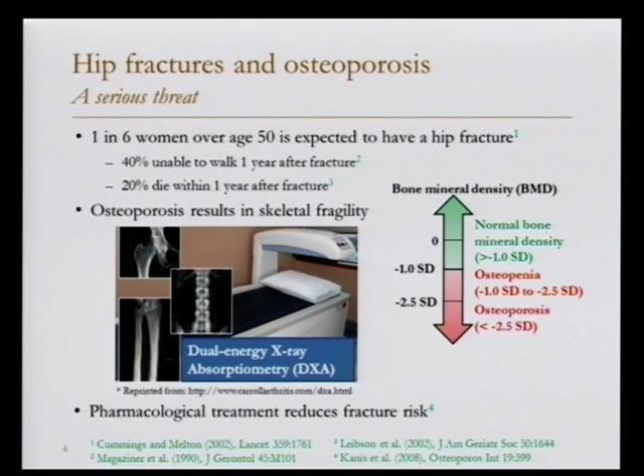As a final consequence, the bone gets brittle, and patients can experience a fracture with just minimal trauma, such as a fall from standing height. For this reason, they're called fragility fractures.

The diagnosis of osteoporosis is done using a device called dual energy X-ray absorptiometry, or DEXA. This device can take a calibrated X-ray image from which bone density can be calculated in a certain area. This density is then compared to the bone mineral density of a young, healthy woman of the same population group, and if the difference is below 2.5 standard deviations, the patient is classified as osteoporotic.

So what happens when you're osteoporotic? Normally you get a pharmacological treatment, consisting of drugs like bisphosphonates, whose main effect is to slow down the bone resorption process. For this type of treatment to be really effective, we need to catch those subjects at risk for fracture in time and with good accuracy.

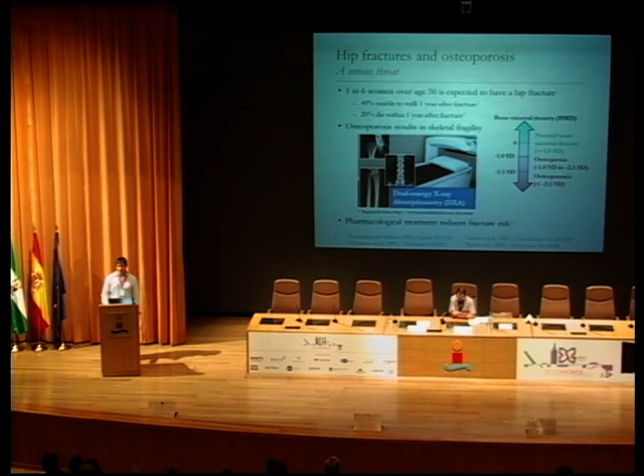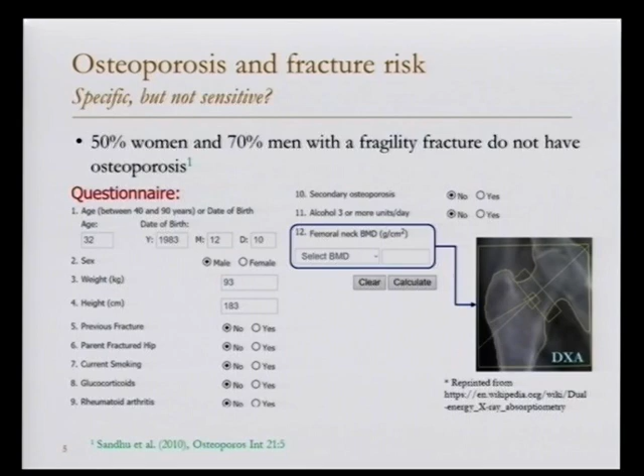For a long time, people at high risk of fracture were considered simply those who have osteoporosis. While it's true that people with osteoporosis have a high risk of fracture, there is also 50% of women and 70% of men who experience a fragility fracture without meeting the requirements for diagnosis of osteoporosis. To account for this, more complicated methods combine bone mineral density with epidemiological parameters, such as previous history of fracture, smoking, drugs, alcohol consumption, etc., to get a better prediction.

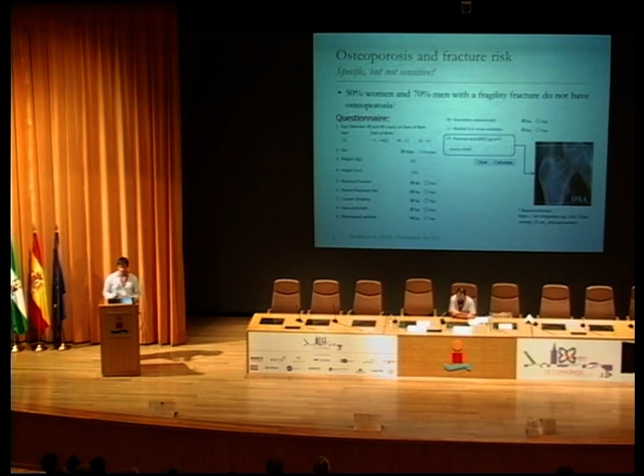However, even with these methods, studies report at least 30% of people who experience a fracture without being diagnosed to be at risk.

One reason for this could be that these methods are only capturing part of the problem, where we can claim that the actual health status of the bone is given not by the bone mineral density itself, but by how strong that bone is. That can be seen as a combination of the density of the bone, how big the bone is and what's its shape, and the different loading conditions to which the bone is subjected.

It's therefore not surprising that finite element models are able to predict the strength of the bone better than methods based on DEXA can do. This was already shown in 1999 by a study by Cody and collaborators. So that's nothing new in a way.

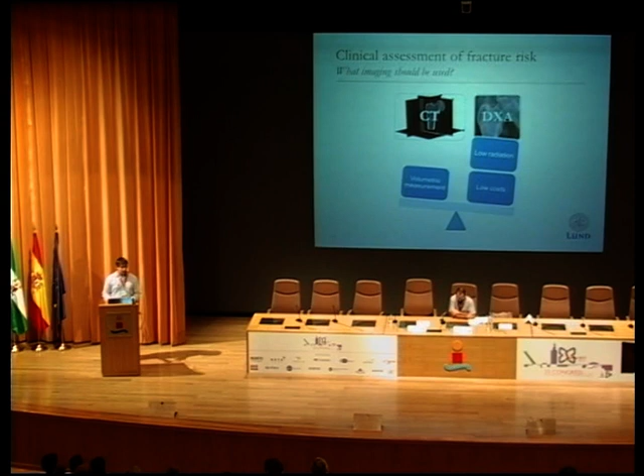So why are we not using finite element models then? Well, there are several reasons, one of which is that to build a three-dimensional finite element model, you normally need a CT scan, which has the advantage of providing volumetric measurements and the shape of the bone, but also has a few downsides, namely a higher radiation dose given to patients, and higher costs for healthcare systems.

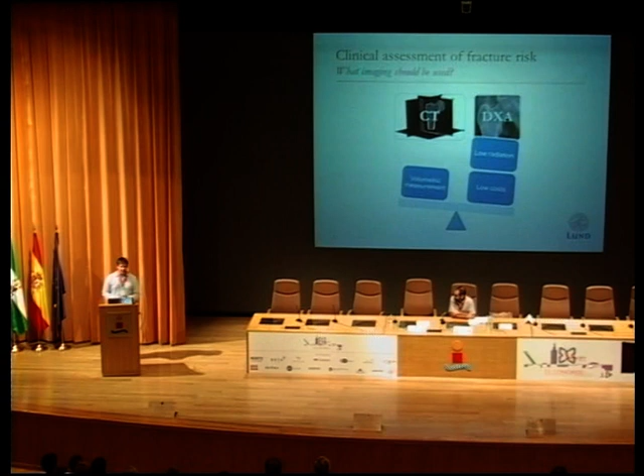As a result, the majority of screening for fracture risk and osteoporosis is nowadays performed with DEXA. So the idea behind this project is basically, can we build a three-dimensional finite element model based on a single DEXA image? To do this, we can use statistical models.

These models are based on previous knowledge of the variability of the anatomy of a femur, in this case a human femur, within a certain population. If you look at a statistical shape model, that's a model where you put as input the anatomy of a population of femurs, and as a result you can describe all the anatomies in this population as the average shape for this population, plus a linear combination of the principal modes of variation within that population. In the same way, you can build a statistical appearance model in which you map how variable the distribution of bone density is for a population of bones.

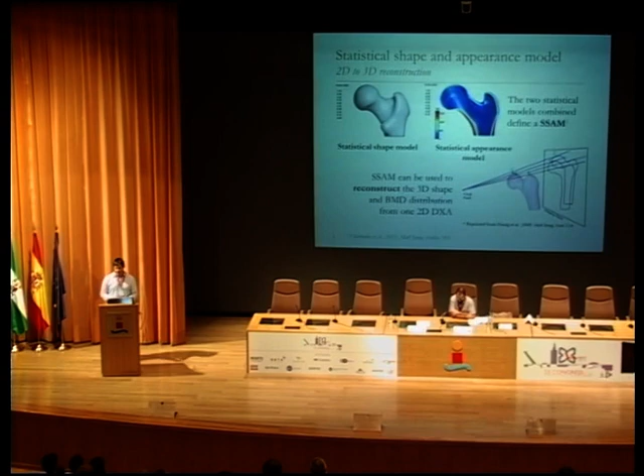When you combine these two methods together, you get what we call the statistical shape and appearance model, which I will call SSAM in the remaining of this presentation.

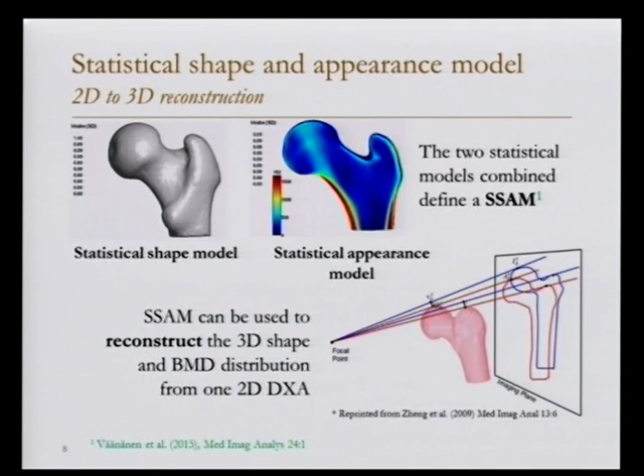So how do we reconstruct the 3D shape then? You can take a SSAM, for example, and manipulate it to select the instance whose projection on a plane gives the best fit when compared to the target image of the patient. So you assume that that one is the actual anatomy of the patient.

That leads to the aim of my PhD project, which was to develop and validate a subject-specific finite element procedure which could predict the mechanical behavior of human femurs starting from a single DEXA image.

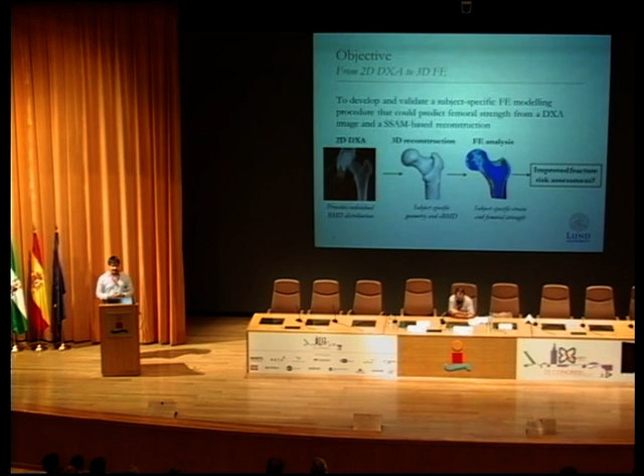To fulfill this aim, I tried to follow this flowchart during my PhD studies, where the three starting points were the mechanical tests, which were used as a basis to validate the predictions from the finite element models.

CT-based finite element models were built, which represented the state of the art in terms of how accurate a finite element model can be for this sample, and also the SSAM, which was used to reconstruct the 3D shape of human femurs starting from a single DEXA image.

The material used in this thesis consisted of 6 composite bones, for which we had CT images and experimental measurements available from a previous study.

We also had 3 human bones onto which the actual tests were performed, coming from 3 male donors from Finland, age ranging between 22 and 58 years old.

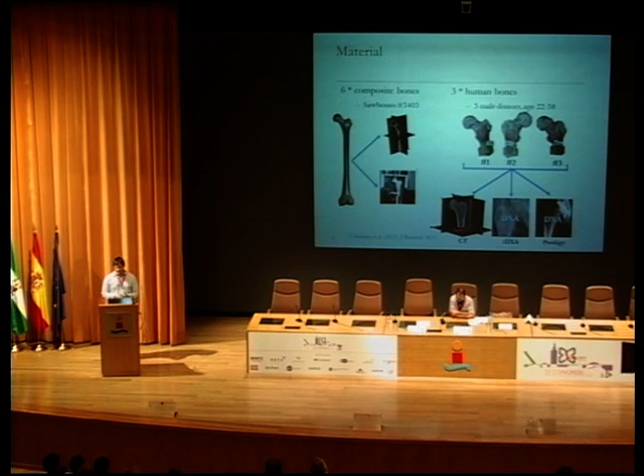For each of these 3 femurs, we had images from CT scans, as well as 2 different DEXA devices, iDEXA and Prodigy from GE, where iDEXA is a newer device with a higher image resolution.

The first step in the project was to perform the mechanical test. When performing a mechanical test, one of the first questions we should address is what do we want to measure and how are we going to get those measurements?

Other than the force displacement curves, which are recorded in pretty much all mechanical tests, we usually like to measure the deformation of the specimen during the test. You can do this with different techniques, some discrete and contact-based, like strain gauges or fiber Bragg grating sensors, or others that reconstruct the full field strain distribution, like digital image correlation and digital volume correlation.

At the moment, strain gauges are still considered the gold standard when it comes to measuring deformation on bone, and that's because they are very well established, known to be accurate, and we know well how to attach them to the bone.

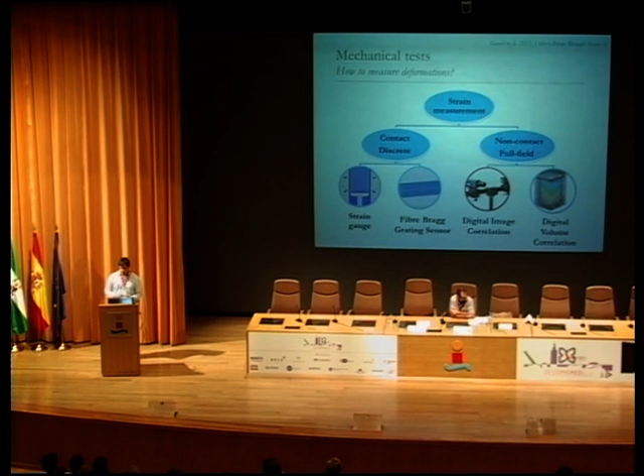But if you look at the program of this conference, you will see that full field measurements have been used more and more in recent years, mostly because you can get way more measurements than what you can get with strain gauges.

So we decided to use digital image correlation in our experiments. For those who don't know, the concept behind digital image correlation is in a way quite simple: if you have your specimen under test, you use 1 or 2 cameras, or theoretically even more, to record a certain surface of the bone.

What you do is paint your sample with a white background and a black randomly distributed speckle pattern, then perform your test.

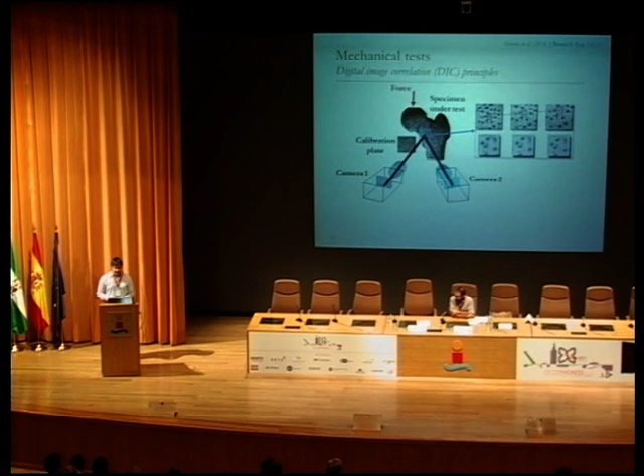After that, you take your images and try to track the displacement of each of these black speckles across consecutive frames. What you end up with is a matrix of displacement, which, if you take the derivative, gives you the matrix of deformation for the surface tracked by the cameras.

That's an example of what you can get. This refers to the major principal strain of one of the bones in our sample, very close to fracture.

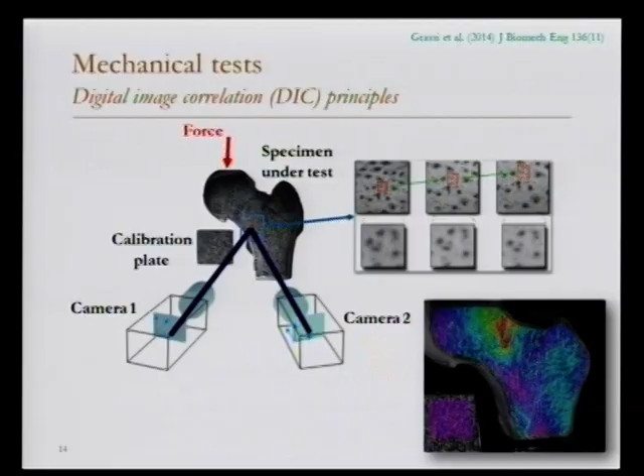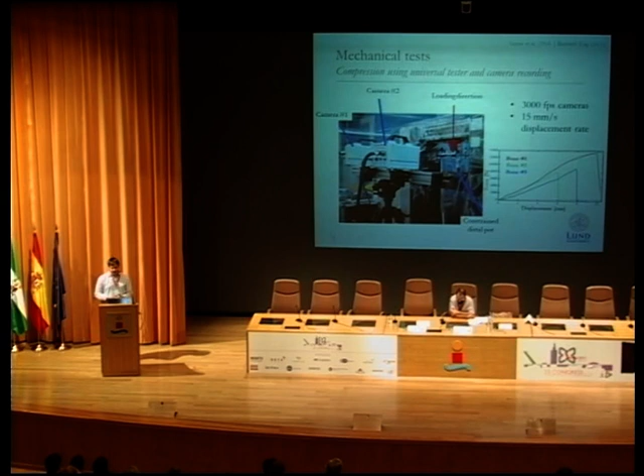So that's a picture of the mechanical test. To perform this test, I went to Delft in the Netherlands, to the Technical University. We placed a bone under the universal testing machine, with 2 cameras to record the experiment.

In this experiment, the distal part of the femur was fully constrained, while we applied compressive load on the femoral head until a macroscopic fracture could be spotted.

We recorded the experiment at 3,000 frames per second, while compressing at a controlled displacement rate of 15 millimeters per second.

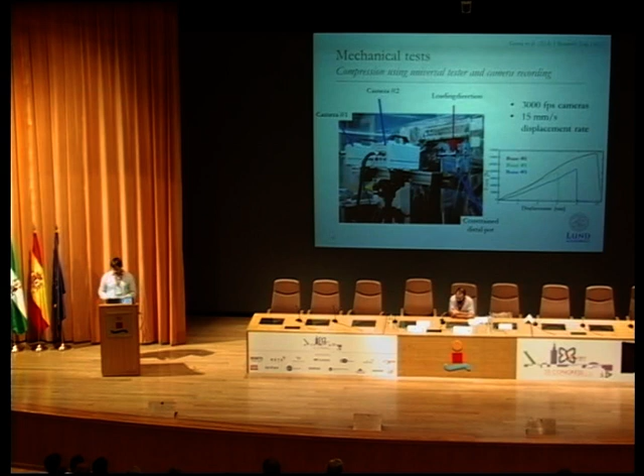After the test, we performed digital image correlation, which proved to be a harder task than we thought at the beginning. There are a lot of parameters, and you have to keep control of a few things. After playing with the parameters, we ended up choosing a subset size of 25 by 25 pixels, which physically corresponds to the size of the yellow squares in the picture.

We also realized there was noise in the measurements, not surprisingly. So we placed an aluminum plate alongside the bone, which was not deformed during the test since no force was applied, but was moving alongside the bone. We used that plate to check the noise levels in the measurements, and to reduce the noise, we applied a 100 Hertz low-pass filter on the displacements before deriving the strains. As a final result, we obtained about 10,000 measurements per bone.

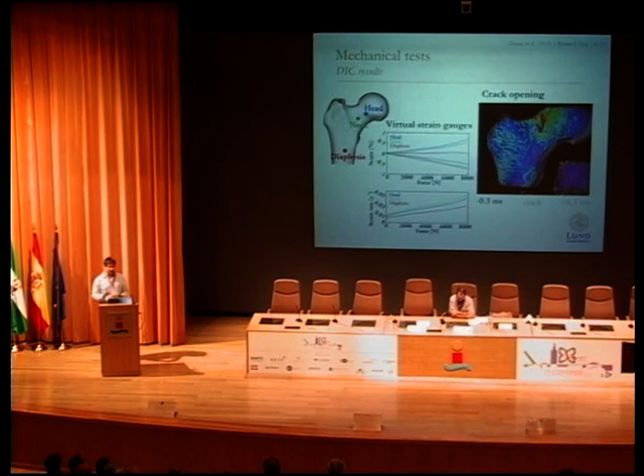Here I'm showing just a few results of what you can extract from these measurements. First, we defined 3 virtual strain gauges on the head, neck, and diaphysis level, and extracted the major and minor principal strains from those regions. This was essentially a way to make a qualitative comparison between the measurements from digital image correlation and what you normally get using strain gauges, comparing against previous studies performed in a similar way.

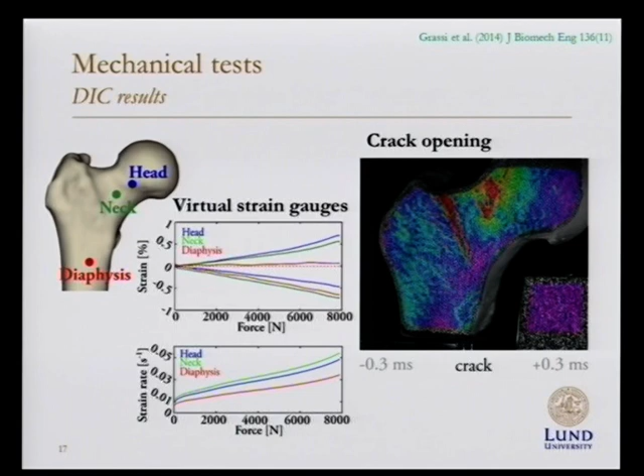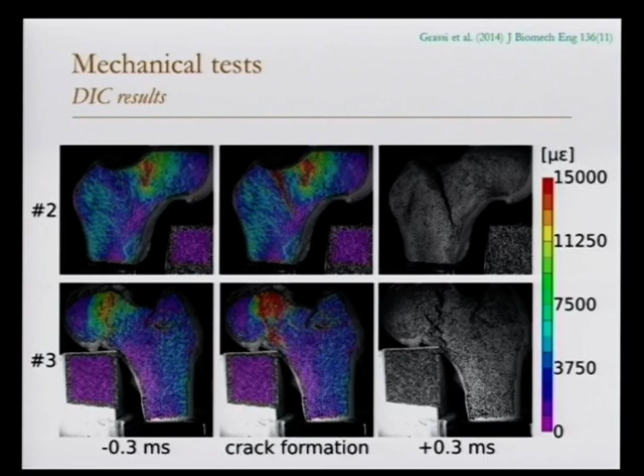On the right-hand side, we can see the pattern of the major principal strain, at least for the moment when the crack opens for specimen number 2. Here again, we can see what happens with digital image correlation when you try to map the deformation at the moment when the crack appears, for specimen number 2 and specimen number 3 in our sample.

At that stage of the project, we ended up with a lot of measurements, essentially just a lot of data. We got some nice clues, but the next step was to build finite element models based on CT images and match those predictions with the experiments. The first question was, how are we going to compare the predictions from the finite element models to the measurements from the experiments, since now we had thousands of points to compare?

To address this issue, we took 6 composite bones, which are quite easy to model. We had the CT scan so we could reconstruct the shape, and we know the material properties from the manufacturer. So we built finite element models that we could trust in a way. We also had mechanical measurements taken by Sami Vanhanen at University of Eastern Finland, where he used digital image correlation to get the strain pattern for these composite bones.

We thought about how to perform the validation. First, we registered the point cloud from digital image correlation over the anatomy of the composite bone. Then for each surface element of the finite element model, we defined the smallest sphere that circumscribed the element, and we ran the validation by selecting the experimental points inside the sphere, comparing the average value of these points to the strain predicted by that element.

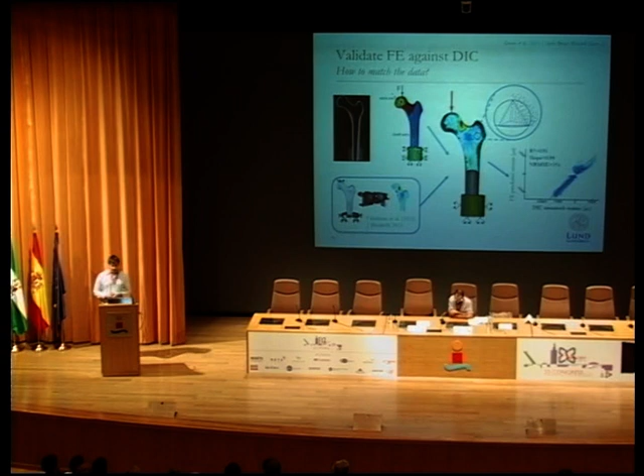Then it was time to build the finite element models. This is a quite consolidated procedure. We took the CT stack, segmented each slice, and extracted the shape. After this, we performed reverse engineering, where we also added the distal pot that was constraining the bone during the experiment. Finally, we meshed the shape using second-order tetrahedral elements.

At last, we mapped the material properties. Here again, we used inhomogeneous isotropic material properties, where we mapped the Young's modulus on each element based on the underlying CT values and the law that links the apparent density of bone to the Young's modulus.

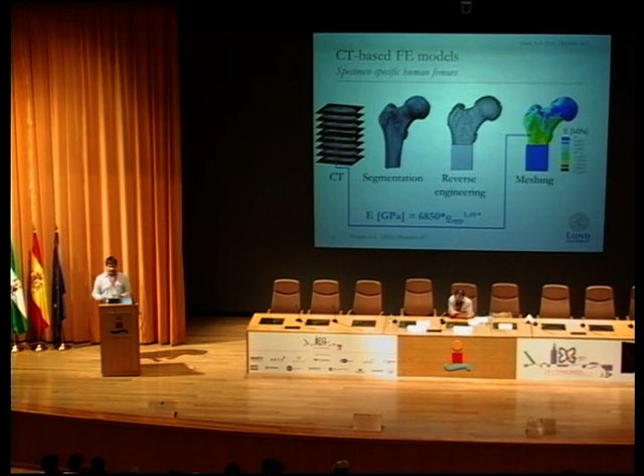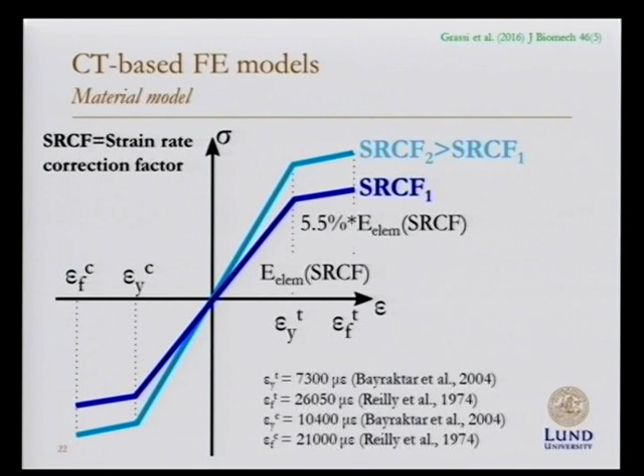But then we had to predict also how the bone fractures, so we had to think about the material model and the way the bone fractures. So what we did is that we came up with a quite simple material model with different strain limit values for tension and compression, and for yield and failure.

We took yield strain limit values from a study by Bayraktar and co-authors in 2004, and ultimate strain values from an older study by Reilly from the mid-70s. We built a material model in which whenever an element reaches the yield point, its modulus is reduced to 5.5% of the original modulus. You continue the simulation, and whenever the first element reaches the failed state, the whole model is considered failed. So that was relatively simple.

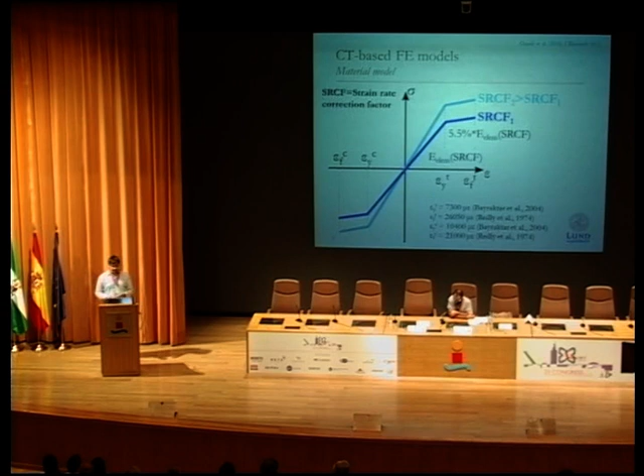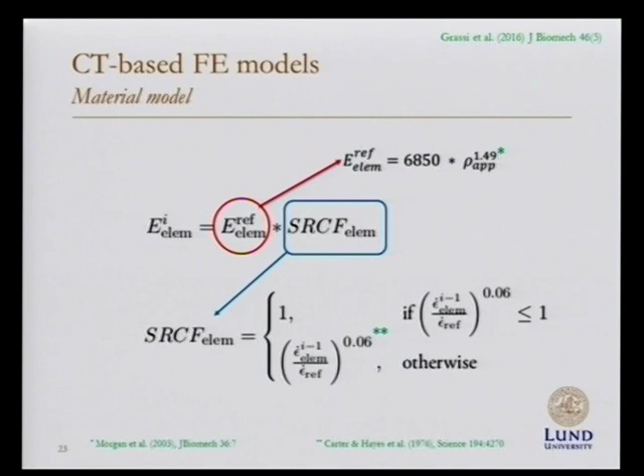Plus, we introduced a strain rate correction factor, which accounts for the bone getting stiffer when you compress it at higher strain rates. So the modulus of the bone is given by the reference modulus times the strain rate correction factor. The reference modulus is given by the empirical law linking modulus to apparent density, and the strain rate correction factor makes the bone slightly stiffer at high strain rates, using a power law to the power of 0.06, first proposed by Carter and Hayes in the mid-70s.

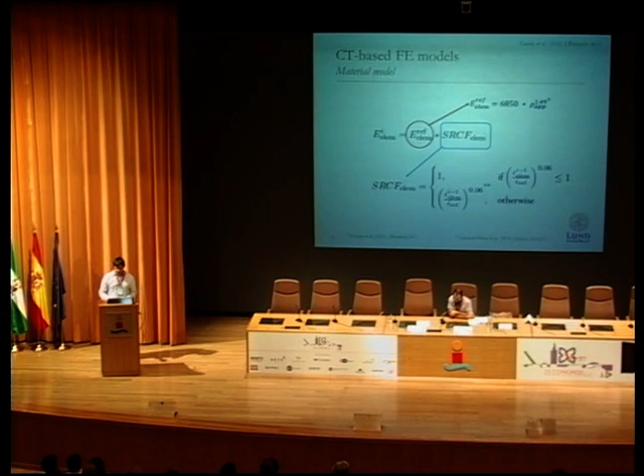So using this modeling approach, we performed our simulations and validated our results. For the 3 bones in our sample, comparing the principal strains at a load of 4 times body weight for each patient, we obtained a coefficient of determination well above 0.9 for all 3 femurs and for the pooled result as well. Slope and intercept were close to unity and 0, and the normalized root mean square error was about 10%.

So we were quite happy with these results, since they pretty much match all the previous published studies available in the literature, with the significant difference that this time the validation was performed against thousands of measurements coming from digital image correlation, not from the 15 to 20 data points available with strain gauges.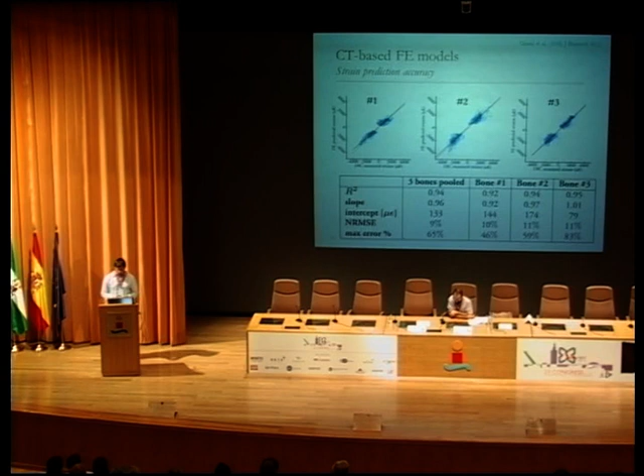This was, of course, not the end of the study, since we wanted to predict the strength of the bone, and so we did. With the material model and fracture criterion we developed, we were able to predict the femoral strength with an error below 2% for bone number 1 and bone number 2, whereas we could not validate bone number 3 because of a problem in the experiment slightly before fracture occurred. So even with only 2 bones, we were quite happy with this result.

Plus, we could see that the predicted fracture origin point was quite close to the experimental fracture rim, where the black line is the experimental fracture rim and the red points are where the model predicted the fracture to start. The model doesn't implement any crack propagation, so that's where it stops in this case.

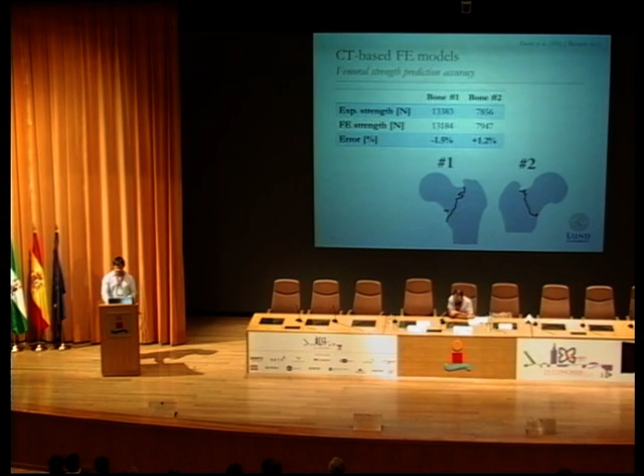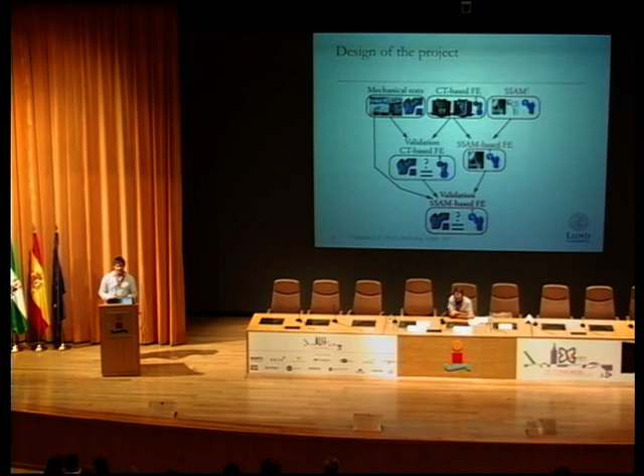So at this point of the project, we had the mechanical tests done, and we had a CT-based model which performed fairly well against these experimental measurements. So the last part was to take this statistical shape and appearance model and use it to reconstruct femoral anatomy starting from a single DEXA image, and see how well this could perform.

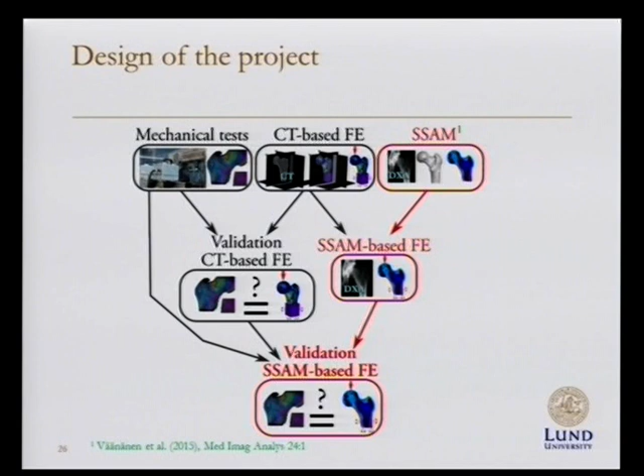So we validated everything against experimental measurements, and then compared against the CT-based model to see which performs best. The goal here was not only to see how well these could perform, but also what are the single components of this statistical shape model-based approach that affect the final accuracy.

So we built 3 types of models: one we call statistical shape model-based BMD models, where the shape came from CT images but material properties were reconstructed from DEXA images; the statistical shape model-based shape models, where it was the other way around; and last, the statistical shape model-based shape and BMD models, where both shape and material properties were reconstructed from the single DEXA image.

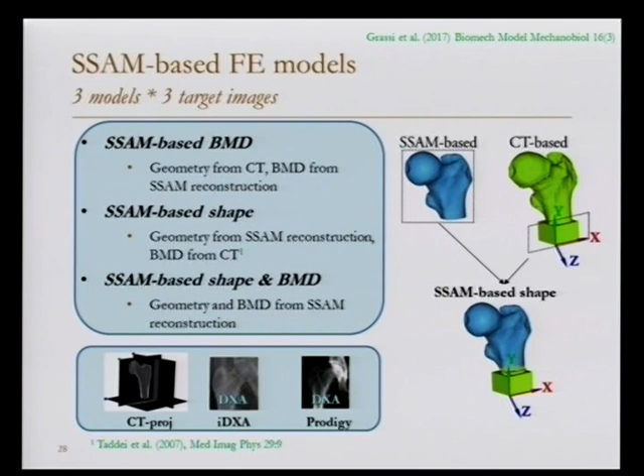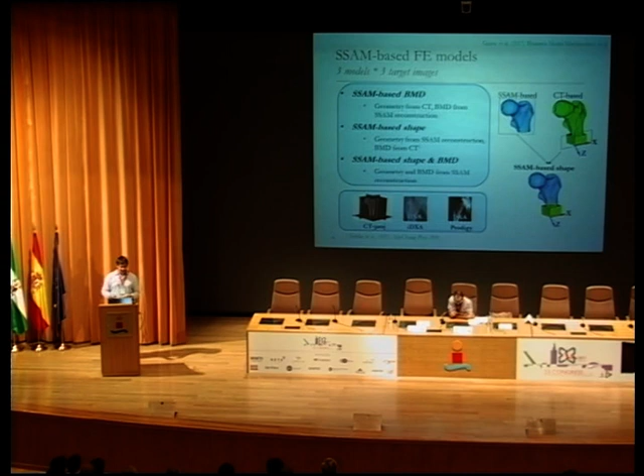We also did this for 3 different types of target DEXA images. One was what we call CT projection, obtained by projecting the CT volume over the anteroposterior plane, representing a sort of optimum in terms of signal-to-noise ratio. Then we had the 2 DEXA images from the DEXA devices, iDXA and Prodigy. So we built 3 models times 3 target images, and validated everything against the measurements.

So a first control we did was to check how good the statistical shape model was at reconstructing the shape.

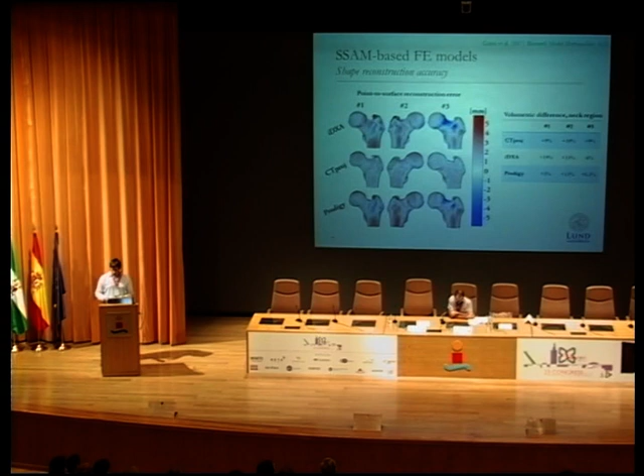When we reconstruct the bone completely from a DEXA image and try to predict the strains, we get a coefficient of determination between 0.87 and 0.92, depending on which target image you use, and a normalized root mean square error between 9 and 12%. That was quite good, since we can consider this just a mild decrease with respect to the performance of the CT-based finite element model.

We also tried to predict femoral strength, and here we had slightly higher errors instead, with an error of 6% for bone number 1 and an error of 19% for bone number 2. In general, depending on which model you build and which target image you use, you might have errors up to 20%.

Since we had a lot of models, we also tried to observe a couple of trends. The first was that the models using CT projection to reconstruct the shape were on average more accurate than those implementing iDXA and Prodigy, again because CT projection has a higher signal-to-noise content.

What was more interesting to observe is that iDXA is a 10-years-younger device compared to Prodigy, with much higher image resolution. But despite that, the performance between using iDXA and Prodigy was quite similar. So it's probably not the resolution, but the actual signal-to-noise ratio, that's the parameter we should look at when building these models.

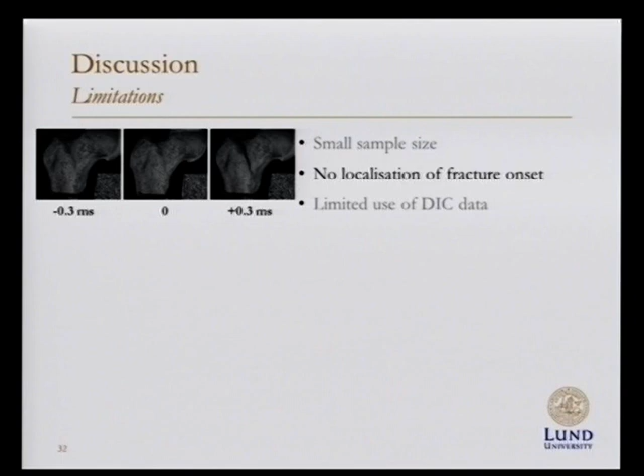A second limitation was that we were not able to localize where the fracture starts during the experiment. This is due to the fact that, if you look at these frames, there is a 0.3 millisecond difference between them, and still there is no crack at frame 0, while in the frame after, the crack has almost propagated all the way through the femoral neck. So even though we recorded 3,000 frames per second, that was not fast enough.

The other reason was that we were recording the anterior side of the bone, whereas for this type of loading condition, it is likely that the fracture originates either on the lateral side of the neck or on the medial side of the femoral neck.

So I suggest that future experimental studies, if possible, adopt a configuration like this, where one pair of cameras tracks the medial side of the neck and the other pair tracks the lateral side of the femoral neck. If you can get 4 cameras and measure the strains using digital image correlation, synchronized at all times, you can maybe get a better description of the strain levels in the bone when the fracture originates.

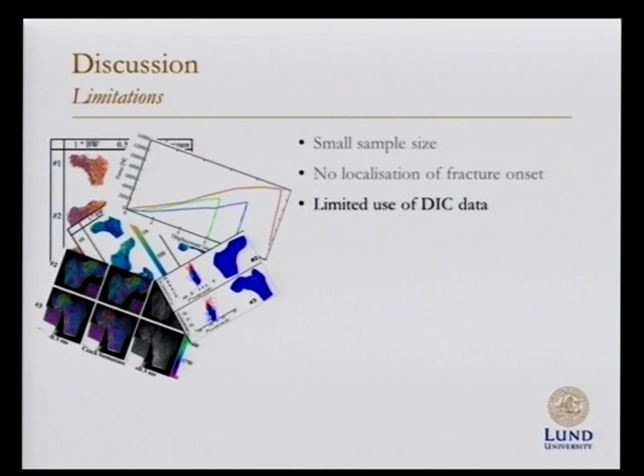A third limitation, which is more of a discussion point, is that after I did this experiment, I quickly realized that digital image correlation comes with a huge amount of data. It's thousands of points per thousands of frames per many bones. Despite trying different ways during my thesis to make use of this data, from plotting principal strain magnitudes to principal strain directions, strain limit plots, etc., most of the data I acquired went unused, or at least unpublished. In a way, I feel it's a pity.

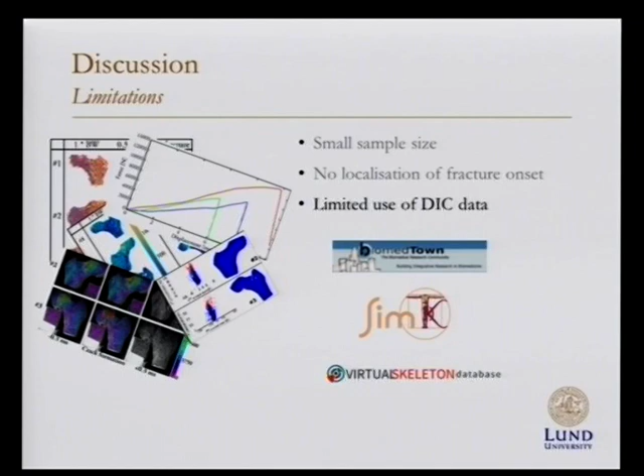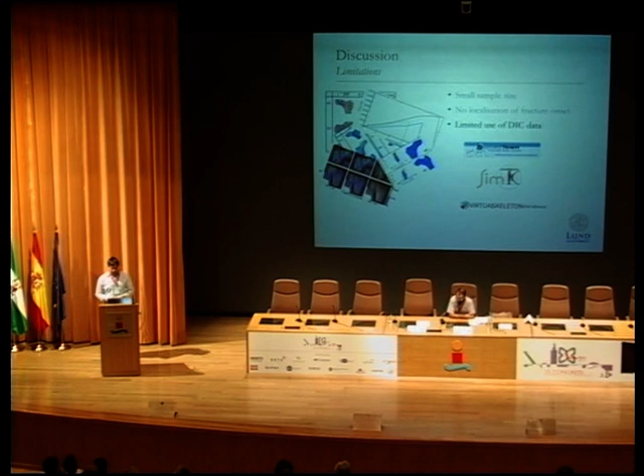I guess there would be many experiments like this with the same outcome. I don't know much about this, but I feel we should find a way to upload this data to some safe place where you can preserve authorship rights but still make it available for others to use if they want. That's a good discussion point about how to share this data safely. Here I'm just listing a few platforms that I know exist: Biomed Town, which we use in Bologna, SimTK, and others.

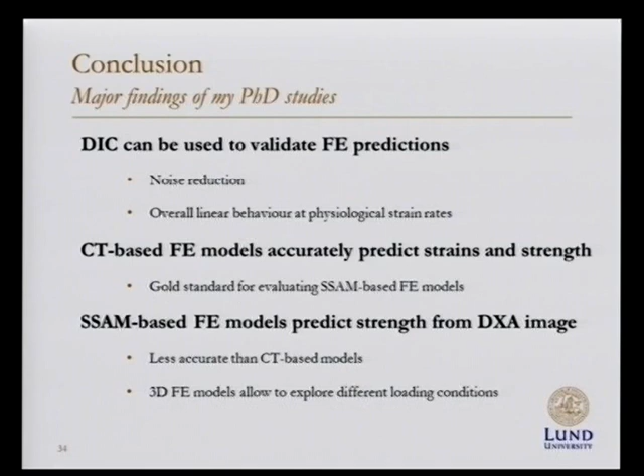To conclude about the findings in my PhD studies, the first major finding was that it's possible to use digital image correlation to validate finite element predictions in a quantitative way, which might sound obvious, but at the time the experiment was performed, to the best of my knowledge, no study had done that before. We also showed that we can reduce noise in DIC measurements, where it's important first to track the noise, because it can be very noisy, and you can reduce it using a simple filter on the displacement before deriving the strains.

We also noticed that our bones behaved overall linear elastic, since they were loaded at physiological strain rates. This was already observed in previous studies, but this time we have thousands of measurements from digital image correlation that corroborate this observation.

A second finding was that the CT-based finite element models were able to predict both the principal strains and the femoral strength with great accuracy. We used these results as a gold standard to see how well we could predict strength using reconstructed models instead. Finally, these finite element models that implement a reconstructed anatomy from a single DEXA image were able to predict the strains fairly well and the strength with a bit higher error.

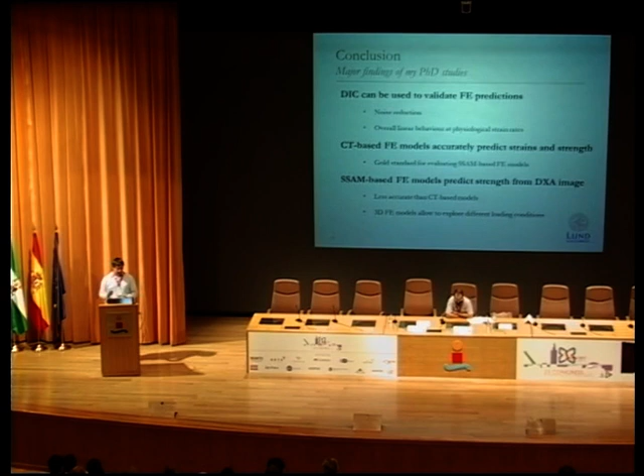But we should not forget two important points. The first is that this type of modeling approach can be more easily implemented in current clinical scenarios, because all you need is a two-dimensional DEXA image, which you already have in current screening. The second is that if you're able to reconstruct the 3D anatomy of a bone starting from a two-dimensional image, then you're also able to test different loading conditions at the same time using finite element models.

This is known to increase the ability of finite element models to separate between fracture cases and controls in cohort studies, for example.

So if we think about how we're going to transfer these types of approaches to clinical application, at the stage where we are now, at least for our project, we need to test the framework under different loading configurations. We'd also like to expand the size of the training set for the statistical shape and appearance model, which could allow us to build different models for each specific population group, for example one for men and one for women, and see how that affects the accuracy of reconstruction.

In a more long-term perspective, I think the biggest challenge is to go from predicting femoral strength to predicting the risk of fracture, which is not an easy task. We'd also like to see how robust this approach is when tested against multiple clinical cohorts and not just cadaver femurs.

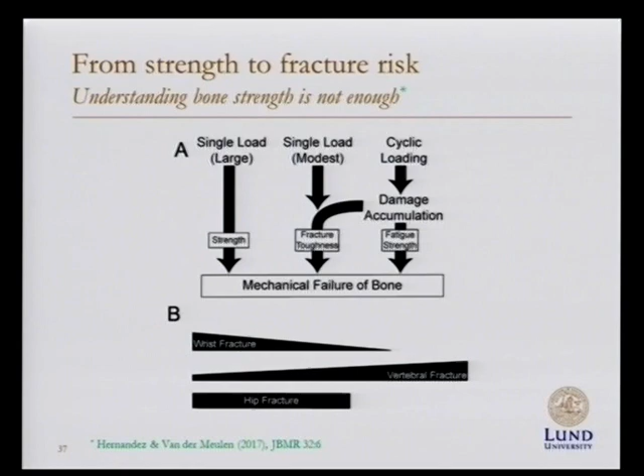At last, I am borrowing this picture from a nice perspective paper that I recently read from Hernandez and van der Meulen, which was published in JBMR. What this image, which I took from their paper, says is that when we consider the mechanical failure of bone...

This can be due to a single large load, where in this case we are referring to the elderly population. So single large load means a fall from standing height. Then it's the femoral strength, the parameter we should look after.

But fracture can also occur as a result of a modest load, which can be, for example, carrying a child, carrying some weight, etc. And in this case, it's more the fracture toughness, the parameter we should look at.

And if we take an even broader perspective and look, for example, at fracturing the spine, this might be the result of repeated cyclic loading and damage accumulation. And in that case, it's fatigue strength what we should look after.

This is just to say that I believe one of the advantages of using computational models, such as finite element models, is not just that we should try to replace BMD in order to predict femoral strength, but we could take advantage of the fact that once you have these models, you can predict way more things than just femoral strength. And those are things that BMD does not correlate with. So I think that could be one interesting key to further develop this type of model.

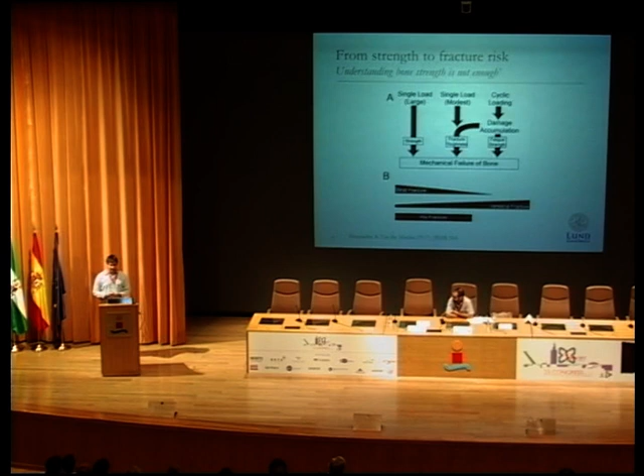Let me conclude by acknowledging the people that helped me during this PhD thesis, starting from my two supervisors, Hanna Isaksson and Matti Ristinmaa from Lund University, and then the people that helped me during these studies. We have Jukka and Sami from University of Eastern Finland, and then I have Harry, Saber, and Amir from the Technical University of Delft in the Netherlands.

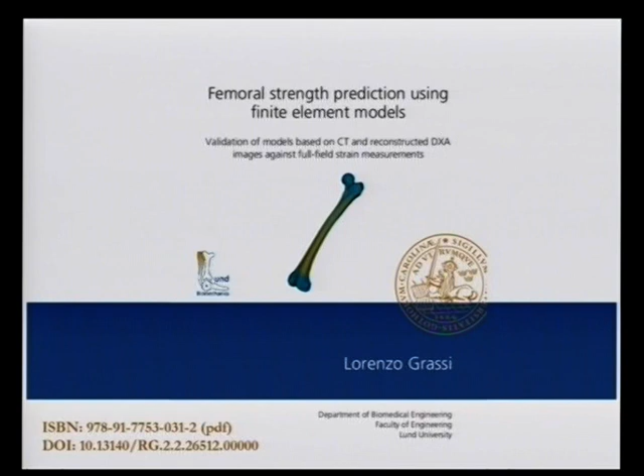I think I should acknowledge all the funding sources I got during the thesis, because they made my life so much easier in the end. This is just a cover page of my thesis. If you're interested, you can find it online. I actually also have a bunch of printed copies left on my shelf, so if you like, just drop me an email and I will send you one. Thank you for your attention.

So Lorenzo, thank you very much for this very nice presentation on an extremely relevant topic, clinically and also scientifically. So yes, question please. Yeah.

Congratulations on your nice work. I'm not very familiar with the experimental methods that you used. Did you distinguish cortical and trabecular bone in your model?

No, so what digital image correlation can do is only track the surface, since you basically have a camera. So what you see is just a deformation at the surface of the bone, while you of course have trabecular bone underneath. The density Young's modulus relationship that you used is also...

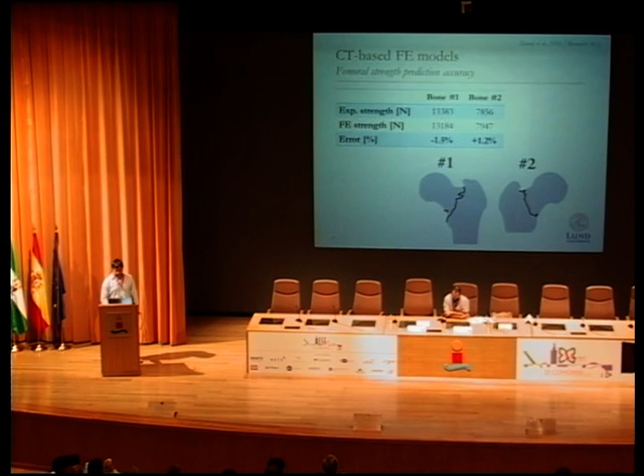Okay, for the models, so you mean... Yeah, models, yeah. This one. Yeah, you said you did use the Young's modulus according to some image data, I believe. Right? So that was also valid for the surface of the femur. Yeah, so we use the same law for cortical and trabecular bone.

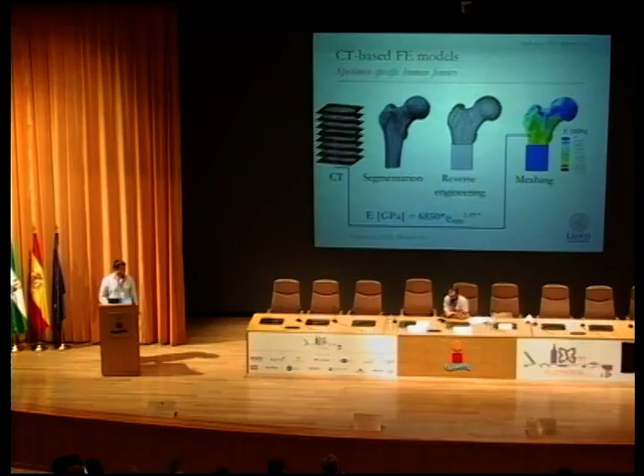And did you simulate the crack propagation? So when a part of the bone fails, you simply removed it from the mesh, is that how you simulated it? No, so in this implementation, we actually just implement yield, and then the fracture, the simulation goes on. Once the first element fails, we assume that everything is broken, so we assume the crack is going to propagate very quickly, as that's what happened in the experiment. So we are not really interested in modeling the crack propagation at the moment. That's actually something we are working on and would like to implement in the future, some more advanced way to model the crack propagation.

One note, the yield criteria that you used by Bayraktar, I think it's more valid for trabecular bone.

That's valid for trabecular bone. Those data actually refer to trabecular bone. However, we use that type of yield limit value also in previous studies. It has been used to predict fracture at all levels, and it proved to correlate very well with femoral strength in the end, both in side fall and in single leg stance. So we trust it, even though it comes from trabecular bone, we trust it enough. Okay, thank you.

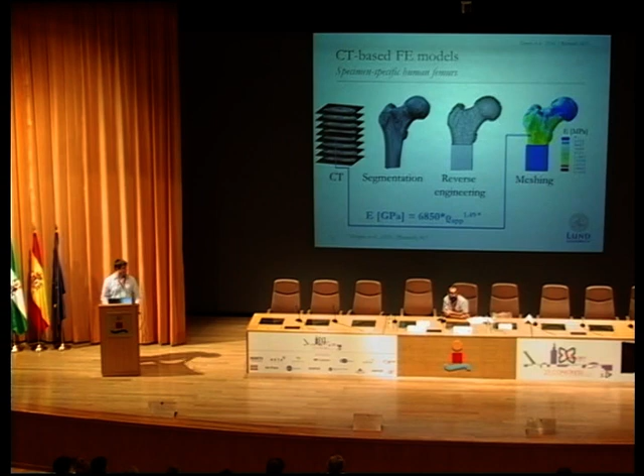Here up. Maybe you can start. Yeah.

Thank you for the nice talk. I'm happy to see that you also visited Delft. I want to ask you one question related to the statistical shape model. If I understood correctly, you use one DEXA scan and then reconstruct the 3D model. How did that occur? Because you say you project the CT scan, but with one view, how could that be possible?

Okay, let's see if I have an additional slide with slightly more details, which can help. So the reconstruction part is what you see in the bottom part of the slide. What you do is take an instance of the statistical shape model and create a digital reconstructed radiograph. It's like you simulate a radiograph over that shape, so you get a 2D image, and then you compare that 2D image to your DEXA image, to see how well they match. We're minimizing the sum of the absolute differences between these two images. If the optimization process converges, you take that 3D shape as your shape. If not, you iterate, keep modifying the shape, create a new reconstructed radiograph, recompare, and go back until it converges.

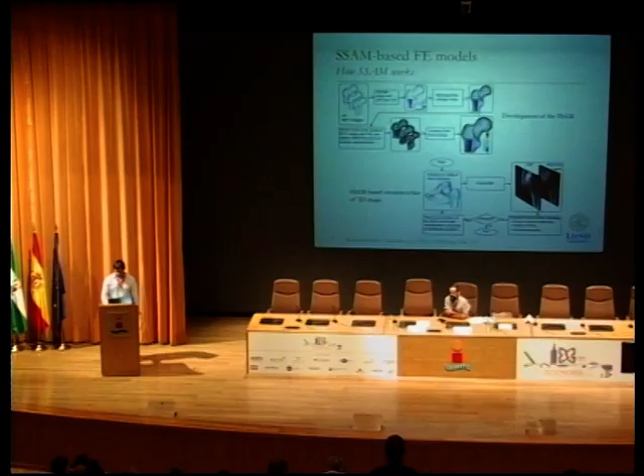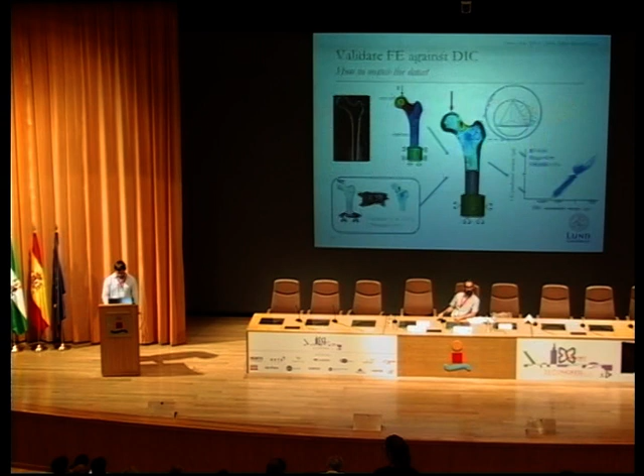Yep, so I don't think I have any specific slide for this, but yes, we did check where this error comes from, and we were in a way happy to see. Let's see if I have an image that helps. Yeah, maybe something like this. Usually the biggest errors are on the border of the DIC cloud, and that's, I believe, a problem of the correlation itself. So in a way, they were reasonably far from...